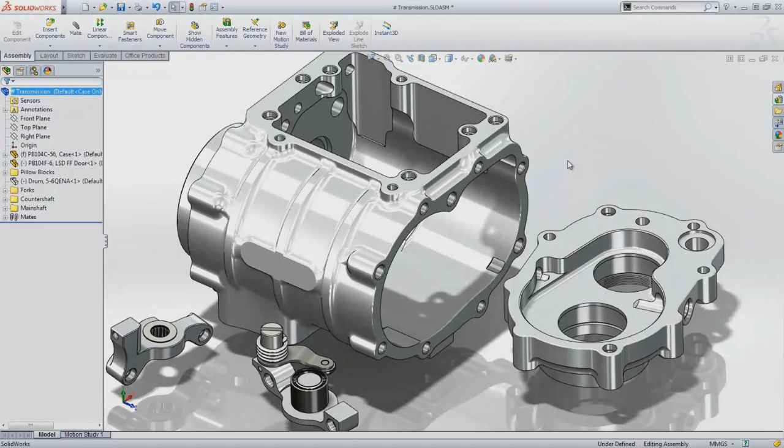The simplest way to understand how mates work is if you were to describe how two parts fit together. For example, in this transmission model from Baker Drivetrain, these two faces should be coincident. SOLIDWORKS has made an intelligent guess as to what sort of mating condition you need. You then continue to add mates until the component is fixed, and you can see how quick and easy this process is. To make this process even faster, you can use Smart Mates.

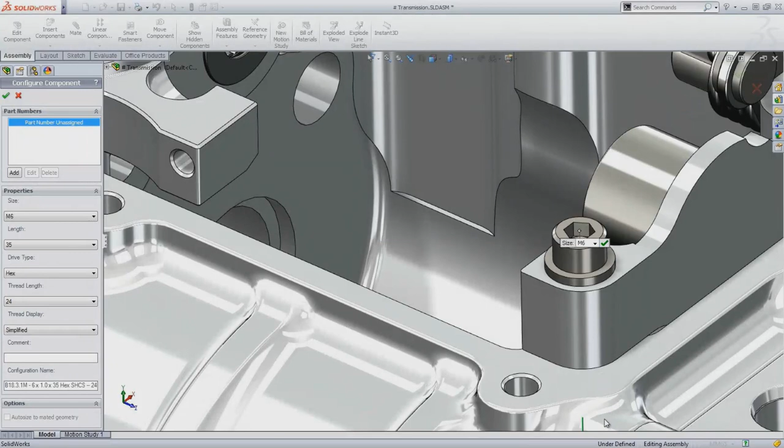Holding down the Alt key whilst dragging a component will automatically add the correct mate type, which you can of course change if you want. Smart Mates can be added to library parts so that reusing them in your assembly is fast and the mates are added automatically. This is a real time saver, especially when adding fasteners from SOLIDWORKS Toolbox. The fasteners from Toolbox snap into place and resize themselves accordingly. Bolts and screws can be resized in length using the Instant 3D on-screen ruler to select the next available size.

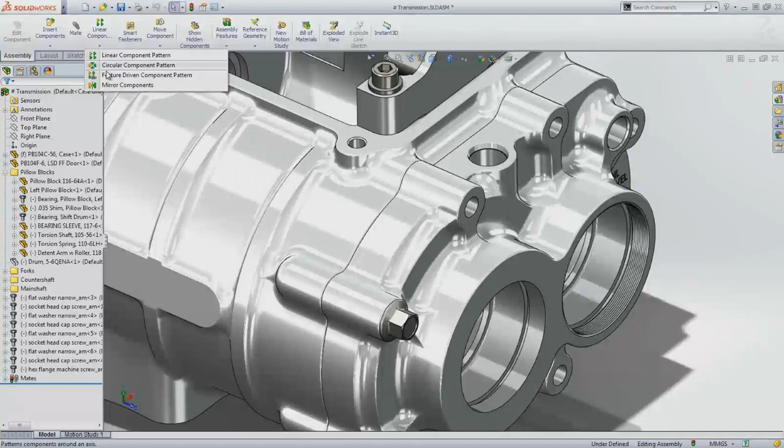The Copy with Mates command makes light work of duplicating one or more components to other locations in the assembly. And if they share a common reference, this can be reused, making it even faster. If a fastener is added to a hole that is part of a pattern, the rest of the holes can be automatically populated. This is fast, but more importantly, if the number of holes should change, the number of fasteners will automatically change as well, so your assembly is always up to date.

The countershaft needs a number of gears and retaining rings assembled to it, so let's use some other, even faster mating techniques at our disposal. Picking an edge whilst using Smart Mate adds two mates simultaneously, concentric and coincident. To add the gears onto the shaft, you need to make them all concentric. To reduce the number of mouse clicks, SOLIDWORKS has a multi-mate option, where one single common reference can be reused any number of times, and the mates can also be grouped into one single feature, making them easy to edit and easy to organize.

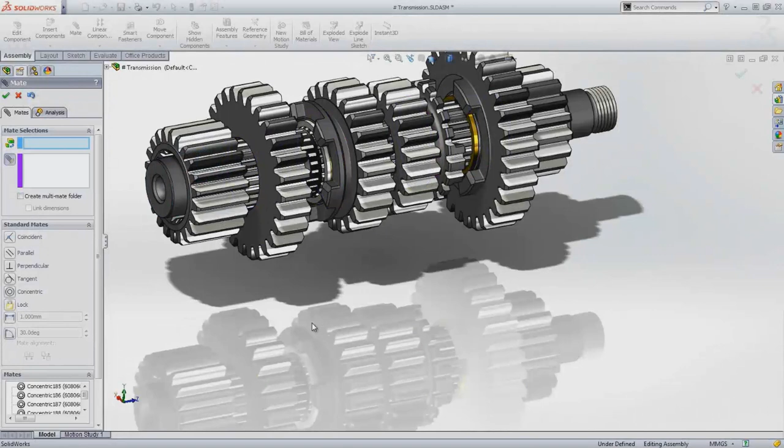To position the gears between the thrust washers, you need to add a coincident mate to each one. The Select Other tool allows you to pick hidden geometry when mating faces or edges, so there's no need to rotate the assembly to add the mate.

So far, we've only used the standard mates, but it gives you a good idea of how easy they are to use. For more complex assembly mechanisms like this one, you can use advanced mechanical mates to complete the job.

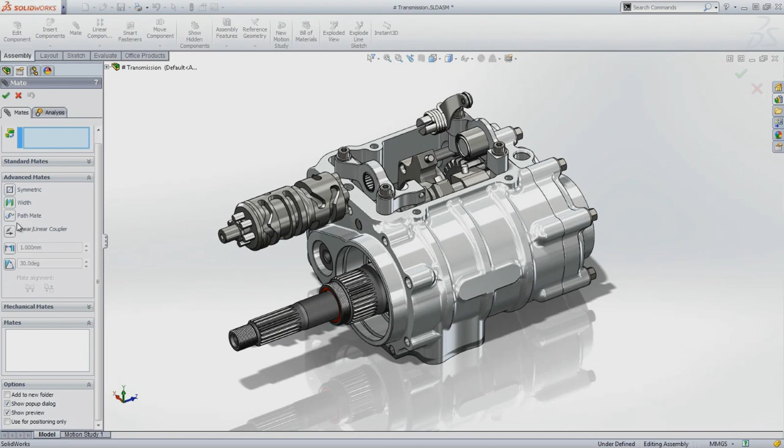Assembling the drum onto the bearing allows it to rotate and translate along the bearing axis. But since the pillow blocks are not symmetrical, there's no center plane to align the drum to. One of the advanced mates, called the Width Mate, provides the best solution. The drum is aligned perfectly between the two pillow blocks and is now only free to rotate.

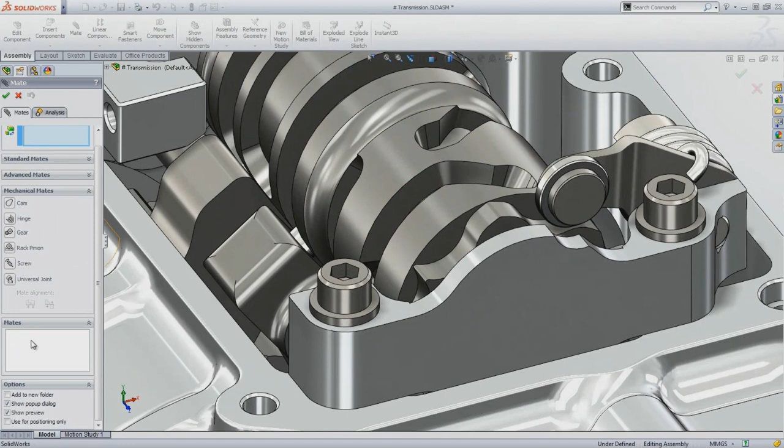The spring-loaded arm is a cam, so you can use the cam mate to make a cam and follower pair using straightforward selections. A cam mate will allow surfaces to have multiple contact points, but this is not always desirable, so a warning message lets you know there could be a potential problem with your design. Now, when you move the drum, you can see the range of motion of the cam at the same time.

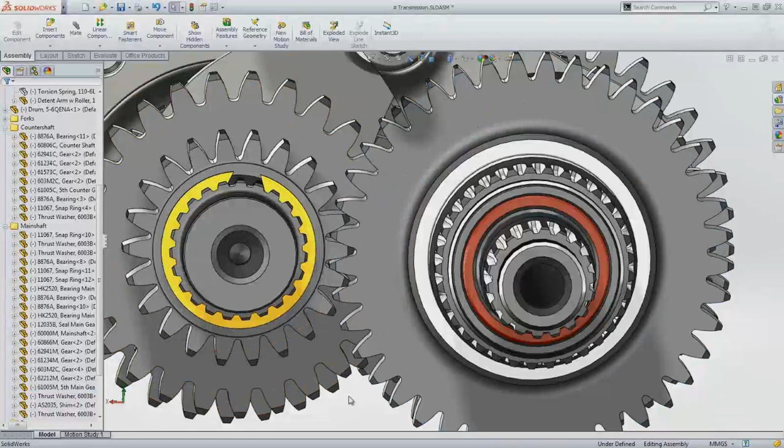SOLIDWORKS has mechanical mates that convert rotary motion to rotation or translation, enabling you to simulate regular gears, bevel gears, and worm gears, or even rack and pinion and screw drives. Selecting a circular edge or sketch defines the gear ratio. So ideally, these gears should have a pitch circle sketch, but this can be easily overridden to get precise meshing of the gears.

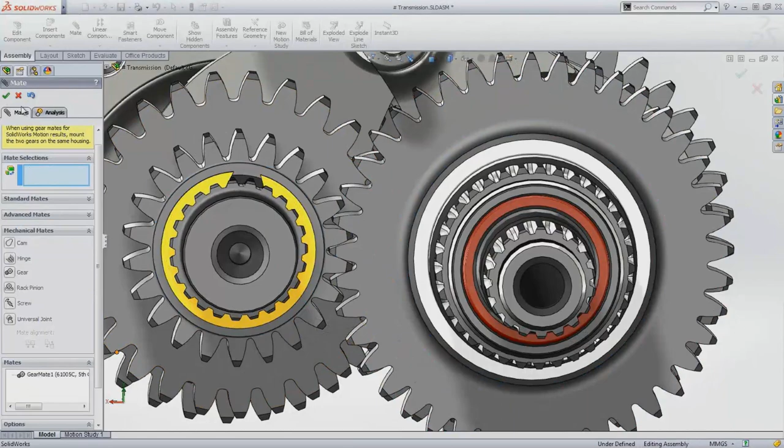Sometimes the screen can get a bit too busy when you've got a lot of components in your assembly, making it more difficult to see what's going on. The easiest way around this is to use the Isolate command. This hides all the other components so you can concentrate on the task at hand. Now, to place the fork in the groove on the gear, you could use the Width Mate or a simple coincident mate.

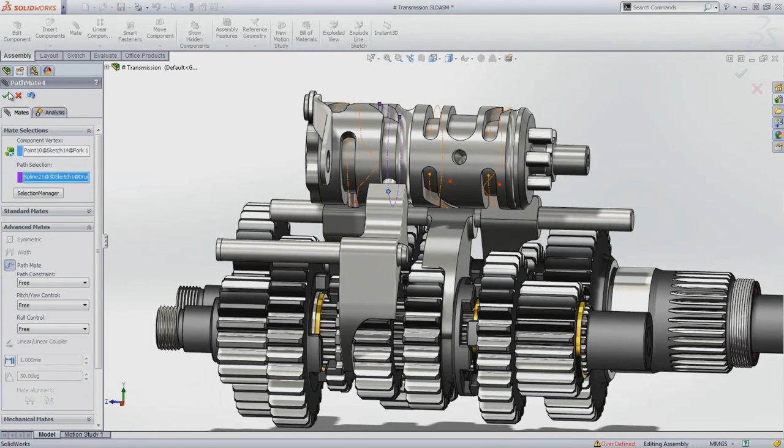Continuing with the design, the fork should run along the slots in the drum. The path mate enables a point to move along a predefined path. The point can be free to move, or fixed at a certain distance, or a percentage along the path, with full control over the pitch, yaw, and roll of the component. This can be used for anything from cams and slots like this to simulating the path taken by components along a conveyor system.

All of these mates added to the assembly can be reused directly in animations or motion simulations, so you only ever need to set up your assembly once, and there's your complex gearbox.

Thank you for taking this quick tour of some of the powerful assembly mates in SOLIDWORKS. We strive to deliver simple but effective tools to help you focus on creating fantastic designs, not fighting with the CAD tools, and to make it an enjoyable experience too.